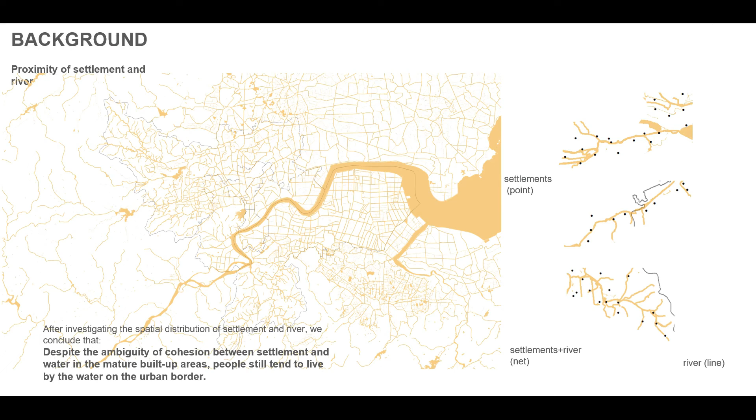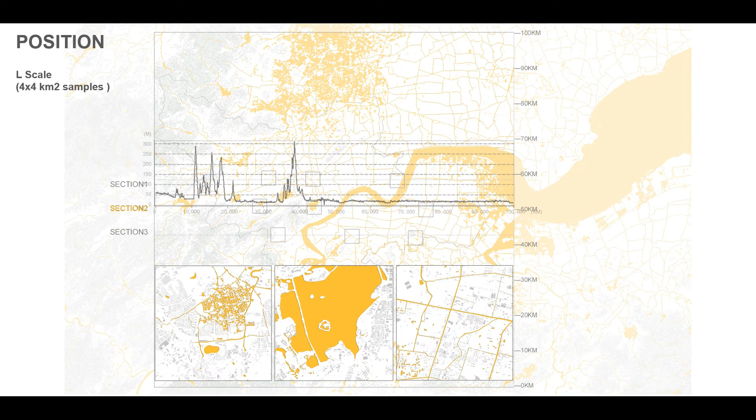Hangzhou, located in the Taihu Lake Basin, has plain topography rather than mountainous territory. Consequently, the water manifests as networks rather than torrents, and decides habitats where people settle down, connecting people, nature, and civilization. The three sites of Transect 2 are respectively around the wetland at the west end, the downtown center, and the suburbs at the east end.

Since the changes of elevation throughout the whole transect are noticeably restricted within 300 meters, what should be paid extra attention to is the diverse textures and implicit questions. The challenges of each case all relate to the absence of connectivity from different perspectives.

For Site 2A, there is a lack of appropriate connection between polluted rivers and fragile wetlands. For Site 2B, the heritage West Lake is isolated due to city development. And finally, for Site 2C, where should ditches go if villages evolve into towns? To handle these questions, we propose our strategies, and connectivity is precisely where our conception starts.

There is a noticeable patch of wetland in the middle of Site 2A, surrounded by residence clusters in the forms of villas and apartments, whose outskirts contain factories with drainage. The southern part of the site is higher and the north is lower.

Noticeably, the wetland is not the lowest point, indicating that somehow there is water flowing out of the wetland to the north. The problem is that both residents and factories unavoidably drain polluted water upstream, conveying nitrogen, phosphorus, and organic materials. Despite the self-purification function of wetlands, human activities' impact may overtake its capacity.

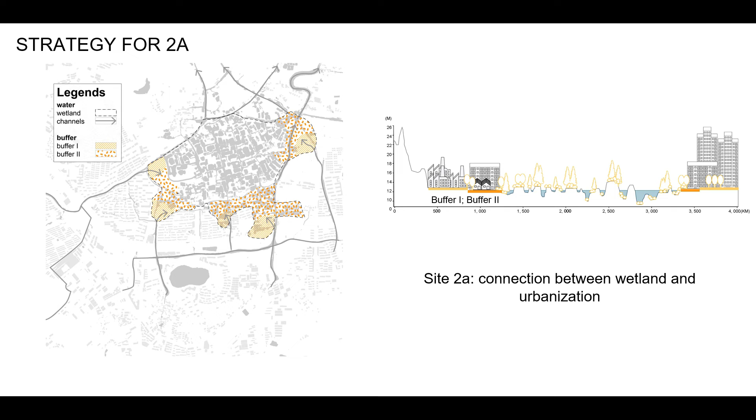For this situation, we delimit certain zones as buffers with dedicated functions to help retain polluted water from directly going into the wetland. To enhance efficiency, inside the buffer zones is also separated by levels of pollutants. We also slightly adjust the rivers at their entrance to the wetland to ensure reliability. Now you will see how it works from a bird's eye view.

Site 2B is the unrefuted center and origin of Hangzhou. The major water body, West Lake, receives extensive attention from governments and the public, so there's no problem in terms of water quality or flood management.

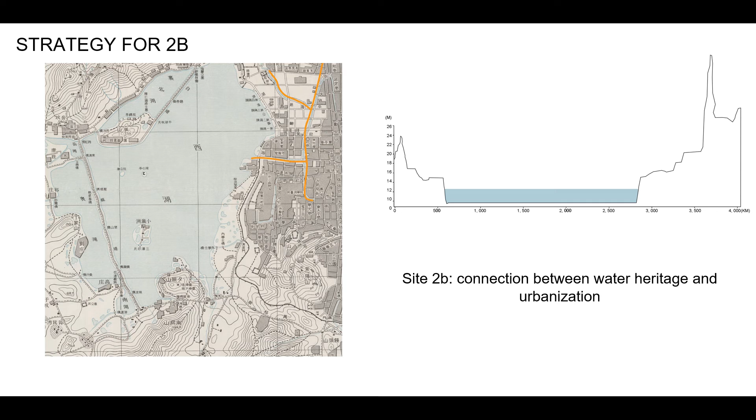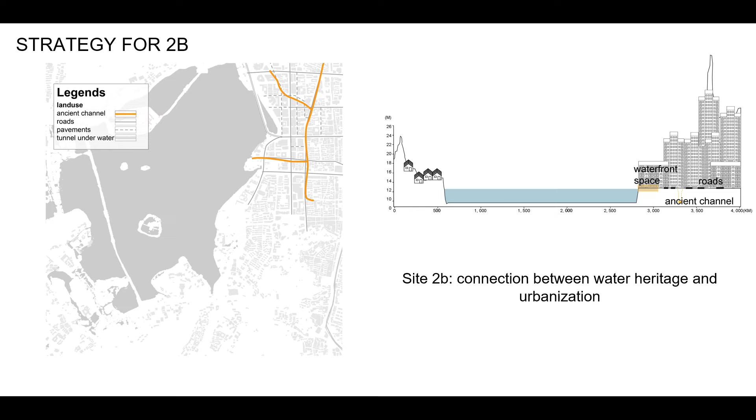However, crazy real estate development and zoning has isolated West Lake, which should be the symbol of civic life. In ancient times, there were rivers winding from the lake, interweaving with infrastructure and municipalities. Finally, we decided to bring back some of the channels and invigorate the bank areas with consideration of present buildings and traffic.

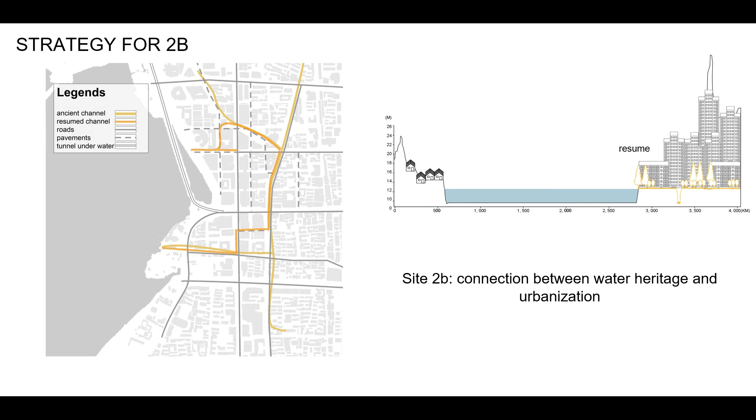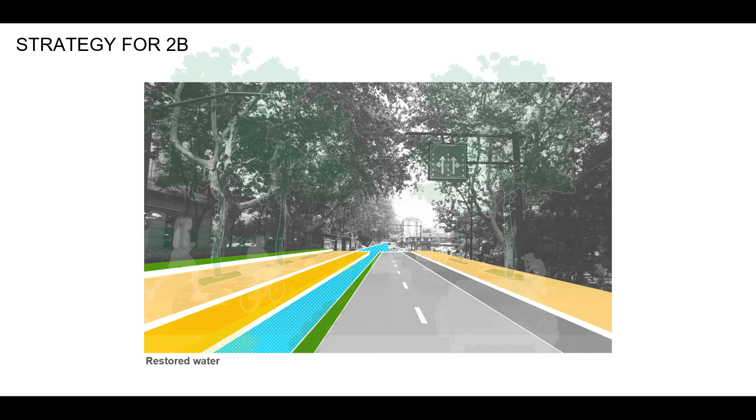In the following perspectives, you will find how the resumed channels will interact with passersby, bike riders, and automobiles. Citizens will be reconnected to West Lake whenever they wander downtown, and the intimacy between people and nature will be nostalgically evoked.

Site 2C has a typical feature of suburbs. Factories, rural houses, and urban houses enclose one another. There are two major functions of the water.

One is for transportation, like canals. The other is for irrigation, including ditches and polders. We could observe that both kinds of water attract people to settle down nearby, especially in unplanned areas.

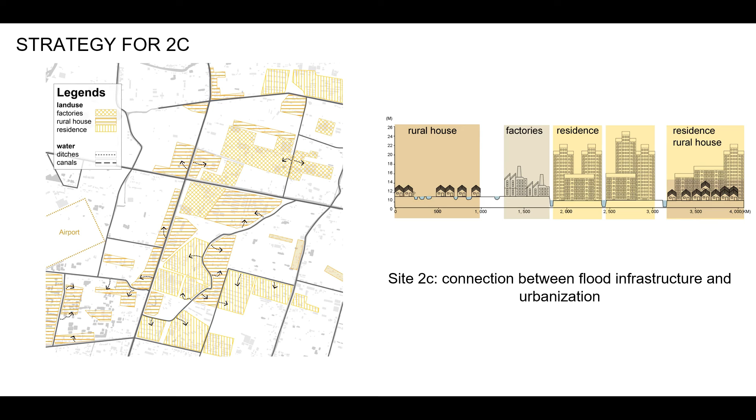But let's imagine how the water will transform when there is no need for irrigation and water transportation in this area. We suppose there should exist infrastructures to help construct resilience by binding everything together as a whole system.

Let's take this area for example. Since it is next to the airport, when all villagers move out, there will be no houses constructed.

But the polders can then connect together via ditches, forming a storage of flood water to relieve the drainage stress of channels. Integrating different levels of water will contribute to a decentralized flood management framework, and the waterfront area of rivers can also play a vibrant role in urbanization.

The metropolitan area includes numerous elements and super complex conditions, and the solutions we propose may benefit finding answers in those cases. Firstly, we need to create more buffer zones like the 2A sample to protect the water in areas under development.

Secondly, we need to look at the water heritage with an inclusive mindset to penetrate it into urban texture. Finally, we can link isolated water to form a decentralized landscape pattern. This is the end of our presentation, and thank you for your attention.